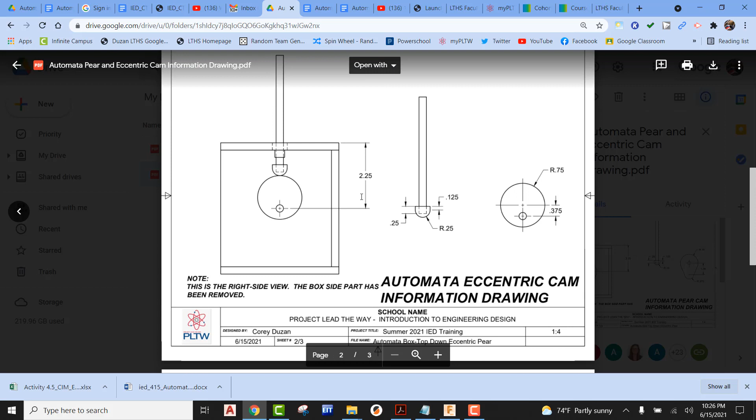Just a heads up, if you go out into our course folder, into Automata Resources, and come down here to find your Automata Assembly Information Drawings, you're going to see one called Pear and Eccentric Cam. We can scroll down to the second page. I'm going to be referencing this drawing for this second video tutorial.

All right, so back into Fusion. First things first, I know I told you to put slider joints at the end of our video tutorial where we were bringing all the mechanism stuff in. I'm actually going to have you tear those out, and we're going to reset that so we can have a good reference point to make the rest of these numbers work.

All right, so I'm going to come up here and find my slider joints. Now, if you're not seeing joints, all you have to do is come next to joints and pick on the fly out, and now you're going to see all the joints that we have used so far. I'm going to find my two slider joints at the bottom, and I'm going to go ahead and simply delete those. Once I delete those, I can now grab it by the follower rod.

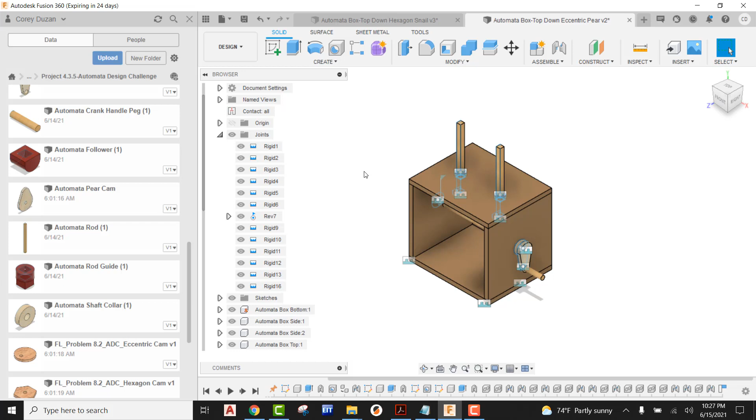Oops, I know what I did wrong. Let me just fix one thing real quick. Okay, now I can grab them by the follower rod and pull those out. And now I can go ahead and kind of reset these with two more slider joints.

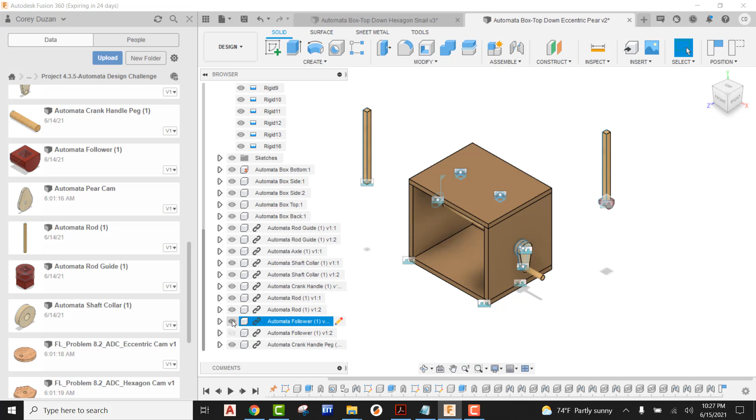So before we get to that, if I come down here, you should be able to see two followers. You're just going to come over here and hit the eyeball, and that's going to turn off the visibility for those followers. We're doing that because we want to use the bottom of our follower rods in order to put in a joint between that and the actual top of the guide.

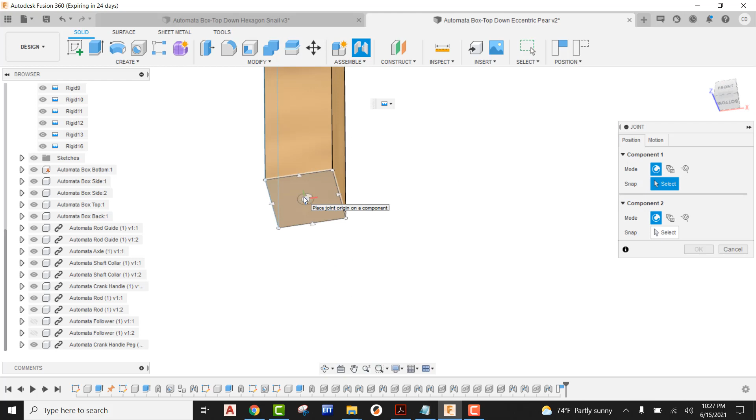So let's do that. Let's go to joint. I'm going to look at the bottom of this follower rod, find the dead center, pick on it, and then here at the top, we're going to come right here to the guide, find that dead center and pick on that to place it in. Now we can see that didn't do the sliding motion that we want, so switch over to our motion tab and find slider, and now we can see that goes up and down. All right, so that's resting right on top there with the slider joint.

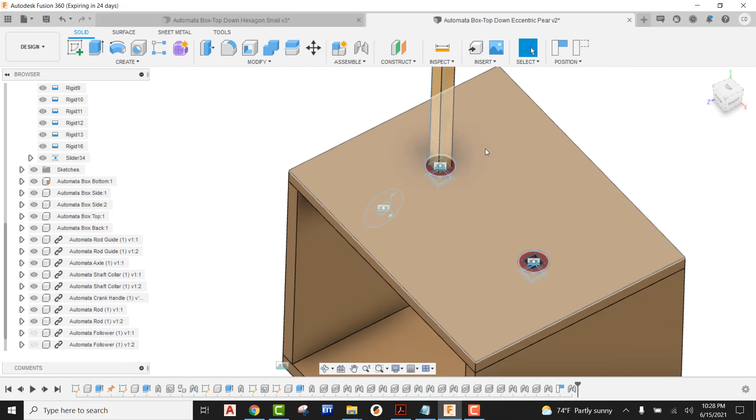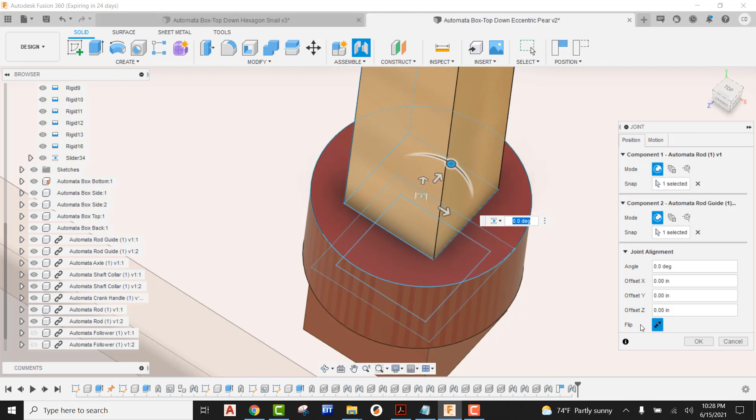All right, so we're going to do the same thing for the second one. We're going to come up here, go to joint, come to the bottom of this follower rod, come up here to the top, get in here close to the guide, and we're going to find that dead center. That's going to come right in. It remembers from last time we were using sliders, so I like it. So I'm going to go ahead and say OK.

All right, so now that we have both of those rods in, now what we can do is come out here and turn on our followers. So I'm going to find followers over here. I'm going to turn those back on by making sure that eyeball is being shown, and we can see that those followers are here.

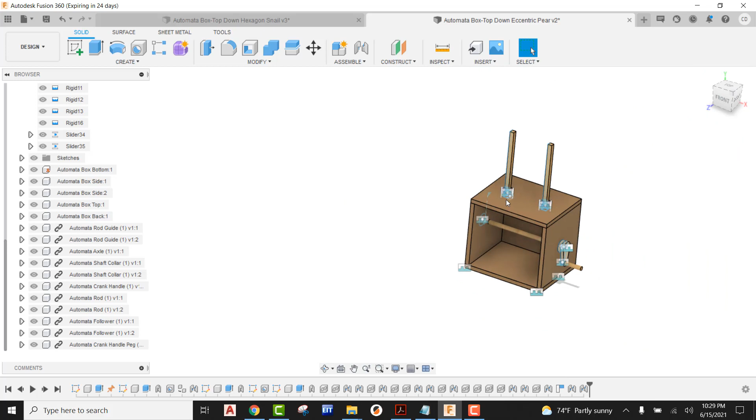All right, so for this one, we said we were going to be using eccentric. So I'm going to go ahead and just drag eccentric across the line, bring that in, grab it by the grip, pull it up off the origin. And before I get out of here, there's a couple things I want to do.

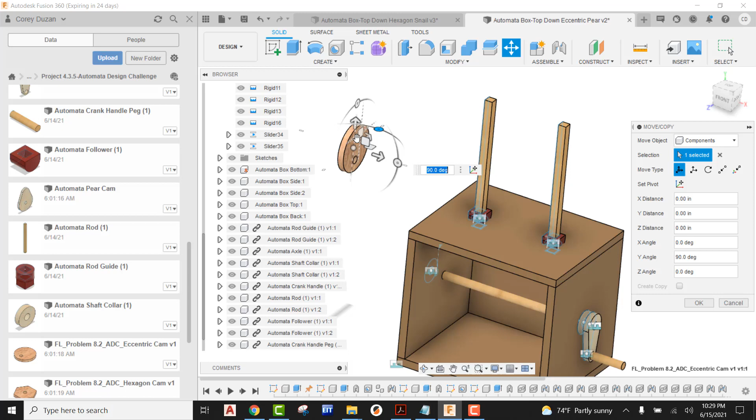All right, so our eccentric cam, we want to probably use the dial, and we want to just sort of nudge this into the correct position. So I'm going to go with 90 degrees this way, and I want the upper lobe of our eccentric cam to be going straight up. All right, so once that is in, I'm going to go ahead and say OK.

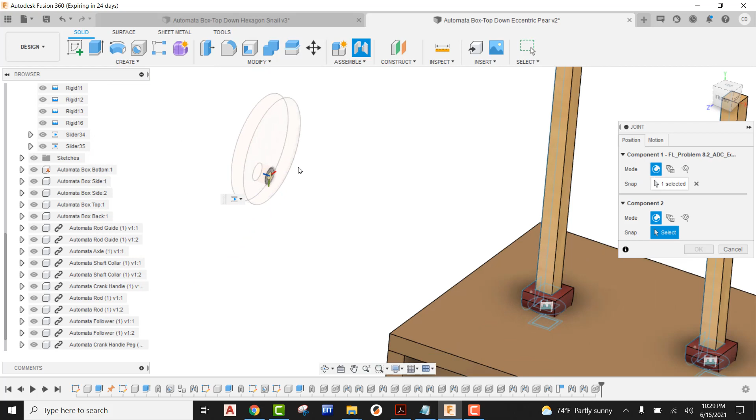All right, so once that's in, now we can come here to joint. I'm going to come right here to this face at the top of the hole, find this joint origin and select it. I'm going to come right over here to the end of our actual axle and pick on that. Unfortunately that's not a rigid joint, so I'm going to go ahead and switch that to rigid. So I can see that that is oriented up, it's flush with that surface, we're good to go.

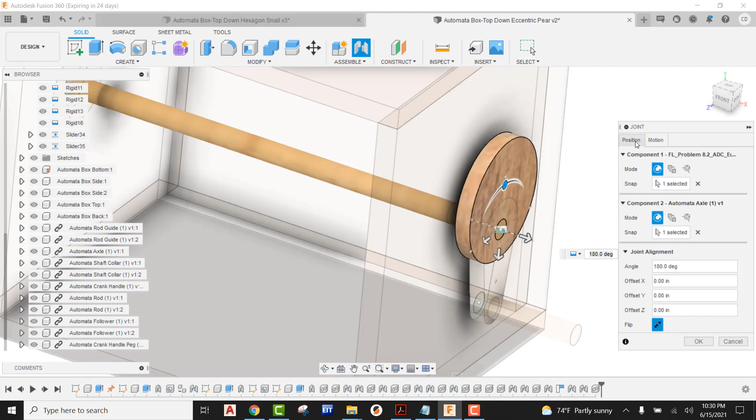But the thing is, we're not gonna get out of this yet. I do want to come back and look at my position. I'm going to look at the front, and obviously we can see that this eccentric cam is not below this follower rod. So I'm going to grab it by the arrow.

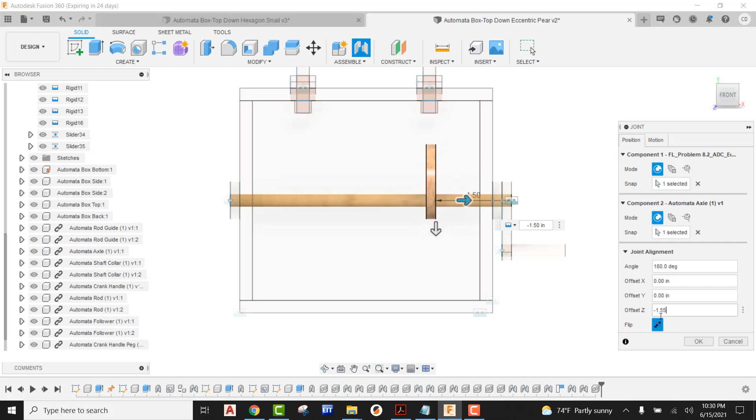I can see I'm going in a negative direction. Looks like I'm pretty close, but it could be nudged over just a little bit more to the left. So I'm going to come in here and change this to like negative 1.55. Get that nudged over. Might be a little bit too far. Let's go with negative 1.525. Looks like that's almost dead center, so I'm going to go ahead and say OK.

All right, so our eccentric cam is in, lobe is up, it's directly underneath the follower rod. All right, we are good to go.

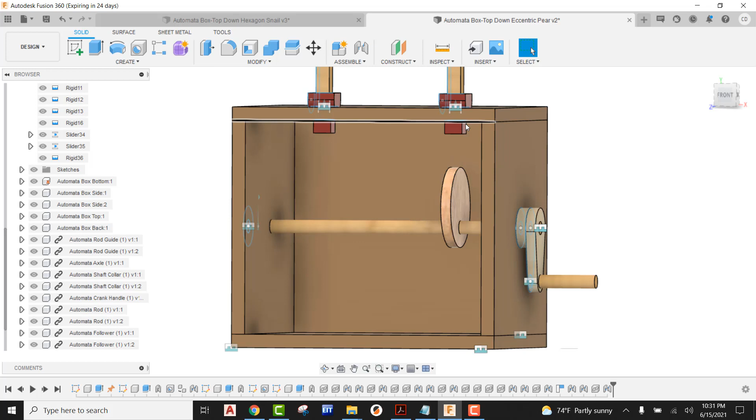All right, so now what we have to do is do a little bit of math, because we're going to take the follower rod and the follower and we're going to push this down, making sure that the follower is making contact with the top of the cam.

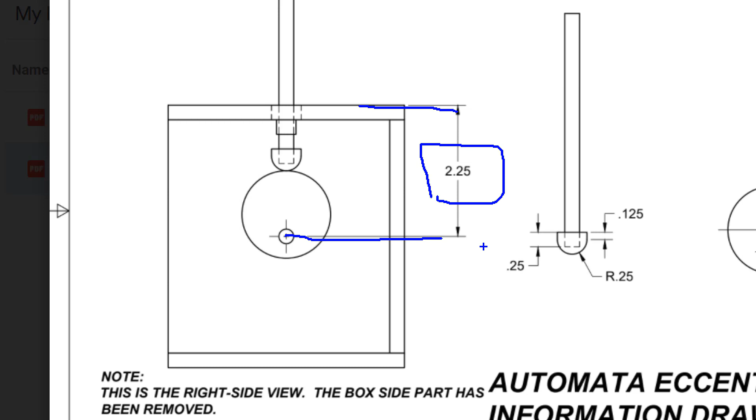All right, so that's where this information drawing comes in. We need to know data, we need to know measurements, in order to get it into the correct position. So if you take a look at this drawing, we can see from the top of the box to the actual dead center of the axle is a distance of 2.25. So kind of lock that away and remember that.

When we look at the follower, we can see that there's a square hole that's drilled down into the follower, and that is drilled to a depth of 0.25. Over here is just this flat face that comes down a distance of 0.125, and then we can see it goes into an arc, and that has a radius of 0.25.

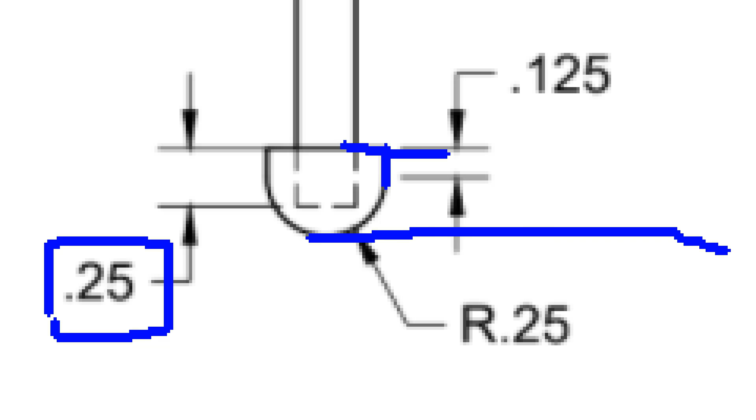So if you're doing a little bit of mental math, you know from the bottom of that to the top would be a distance of 0.375. So 0.375 from here to here, which means - boy, is that an ugly 0.375 - which means we now know, with a little bit of math, what the distance is from the bottom of the hole down to the bottom of that arc. If we took 0.375 and subtracted 0.25 from it, you guessed it, we have a distance of 0.125. So we have to remember that.

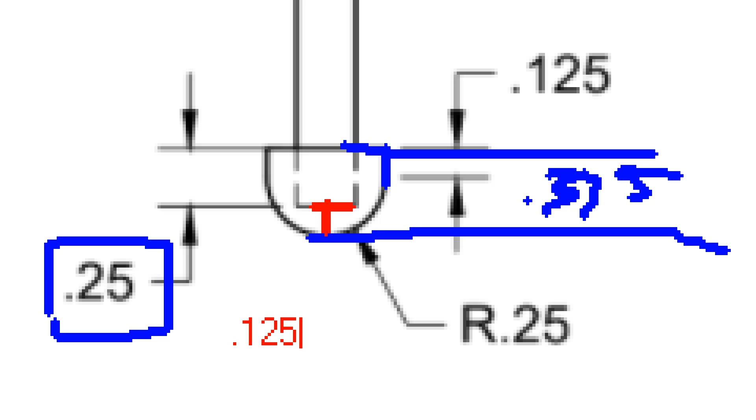Okay, over here on our eccentric cam, if we were to take a look, we know that the distance from the center point up here to the top of the circle is 0.75. We can see that has that radius. If we took 0.75 and we added 0.375 to it, you're going to be seeing that that is a distance of 1.125. So this would be 1.125 from here to here.

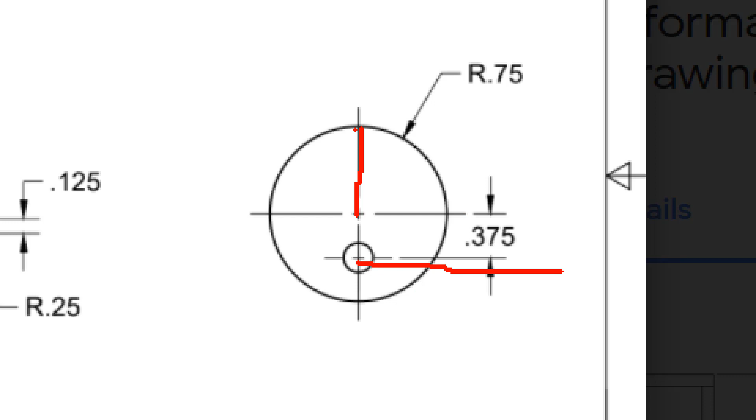And basically what's left over then from the center point of our axle down to this edge would be 1.5 minus 1.125. That means that that would be a distance of 0.375. All right, so these are all numbers that we're going to be using here in a little bit. I'm just showing you where we're getting them from.

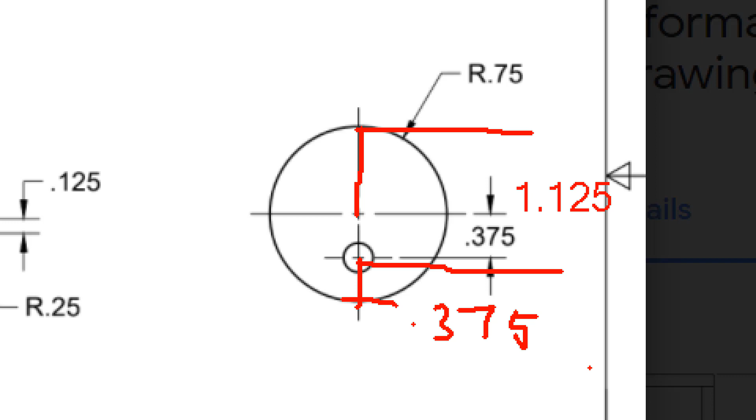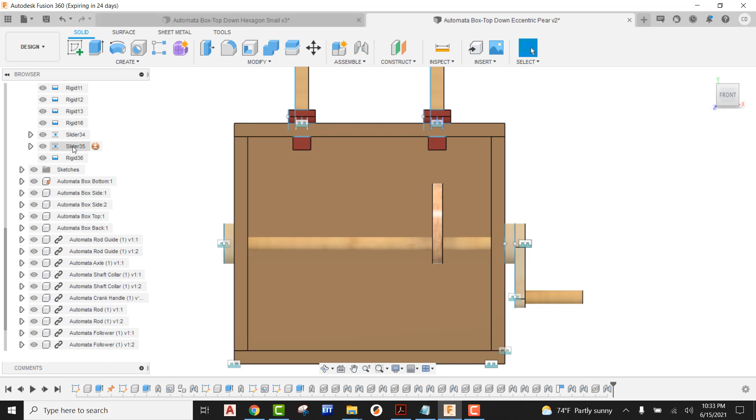All right, so back into Fusion. What I'm going to do is I'm now going to come in here and modify this slider that we see right here. If you're ever wondering which slider is which, once you highlight it - I'm not clicking on it, I'm just hovering over it - you're going to see that one's going to turn darker on those icons that we see in front of us. So I can see in my case, this is slider 35. So all I have to do is right click on that, and what I'm going to do first is edit the joint.

All right, so what I'm going to do is grab the follower rod. I'm just going to pull that down. We can see that that's in a negative direction. So if I took that to negative 2.25, we're going to see that that is going to be dead center, okay, of our actual axle.

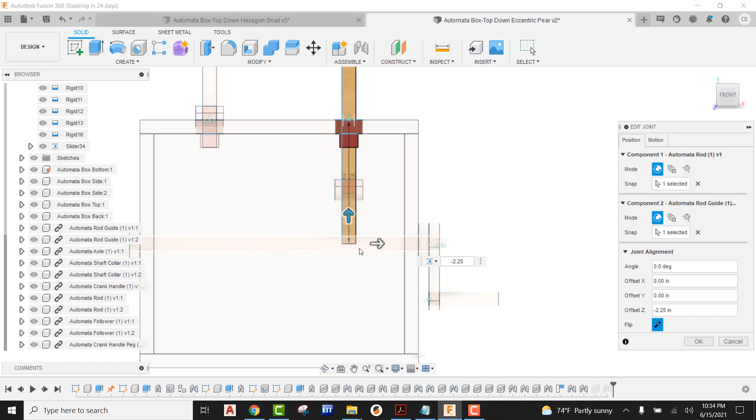The thing is, though, is that we now have to start compensating for the thickness of our follower, and we're going to be talking about the larger side, okay, of our eccentric cam since it's pointing up. So what that means is we're going to be adding that distance, okay, that's here at the bottom of the actual follower, which is 0.125.

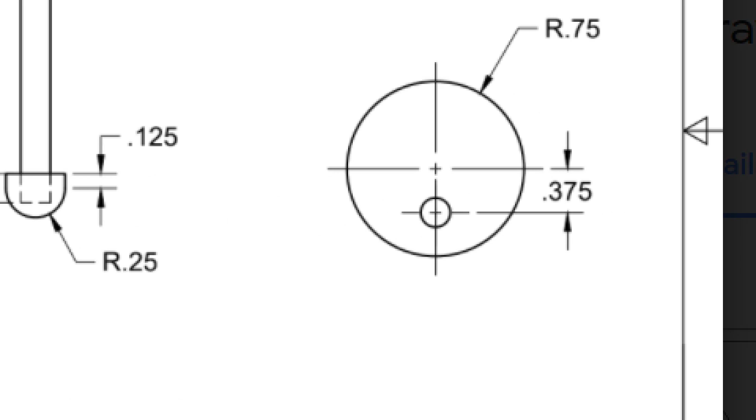So back into Fusion, I'm going to say I want to add to this 0.125, and then I want to add the upper half, okay, of our eccentric cam since it's that top portion that's pointing up. So we said over here, from the hole to the top is going to be a radius of 0.75 plus our 0.375, which gives us a distance of 1.125. So I'm going to add in here 1.125 to bring that up.

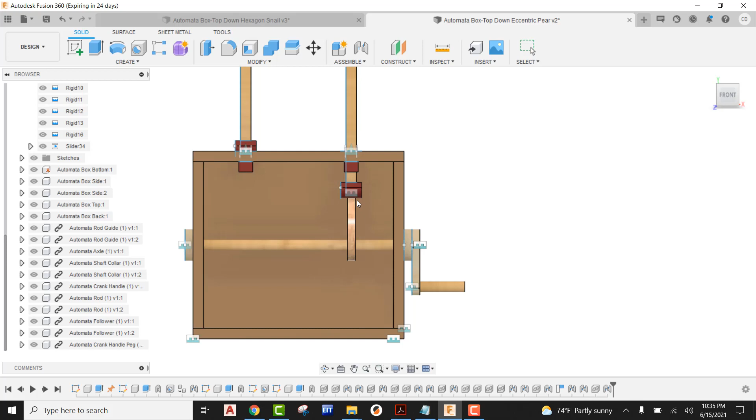Once I've done that, I'm going to go ahead and hit OK, and we should be able to see that follower now is resting on top of the cam.

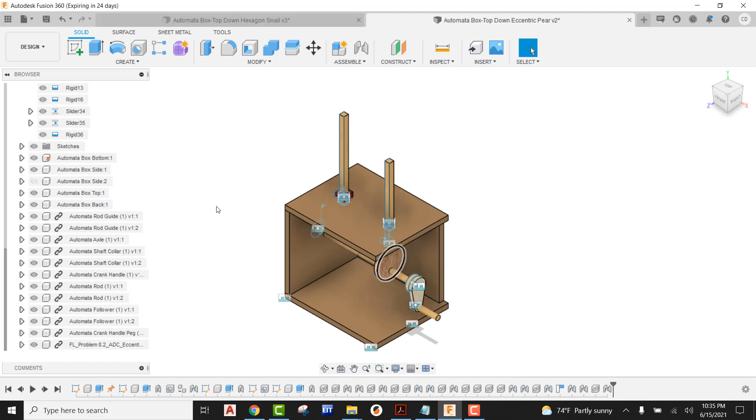You don't have to do this next portion, but I'm going to just go ahead and do it just to show you. I'm going to come in here and just turn the visibility off on my side. Look at this from my right side view, zoom in here, and we can see that that follower is resting right on top of that eccentric cam. So I'm going to go ahead and just turn that side back on.

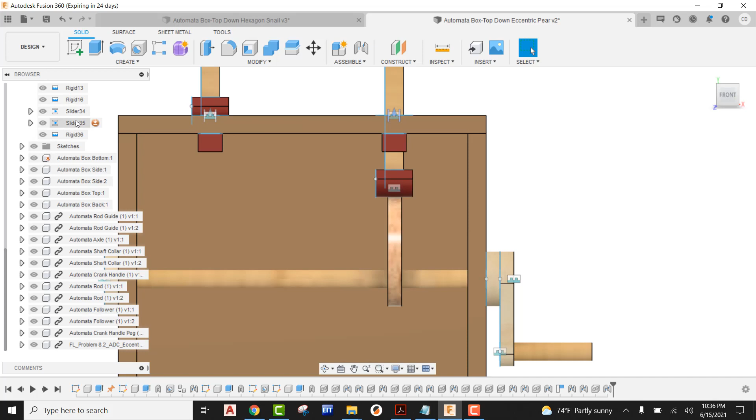And now we can go ahead and start figuring out what our joint limits are. In this case, this is starting here on the top. So I'm going to come up here and find which slider this is going to belong to, and I can see that that's slider 35. I'm going to right click and pick on edit joint limits.

All right, so the thing is that our rest is going to have to be at the lowest point that it can, okay, on the cam. So I'm going to come in here and go to rest. What we're going to have to do here is just a little bit of math. So right now we're sitting at the top of our cam, which is 1.125. And if we subtracted 0.375 from it, we're going to see a distance of 0.75.

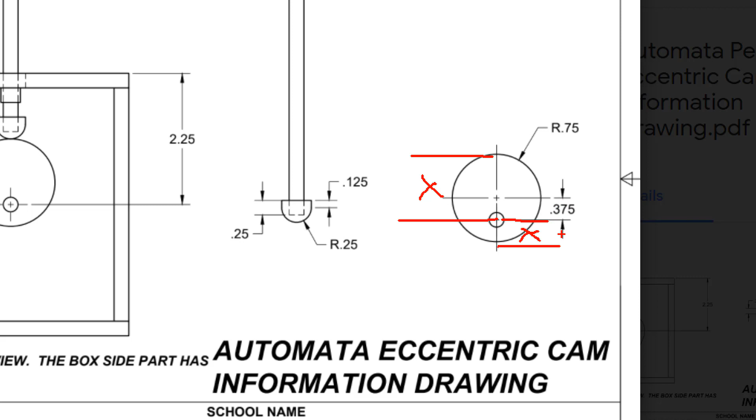So if we take a look here, what we're going to do is take the maximum value that we have, and we're going to be subtracting the minimum value. That's why it's going to be 1.125 subtract 0.375 to find the difference, which in our case is going to be 0.75.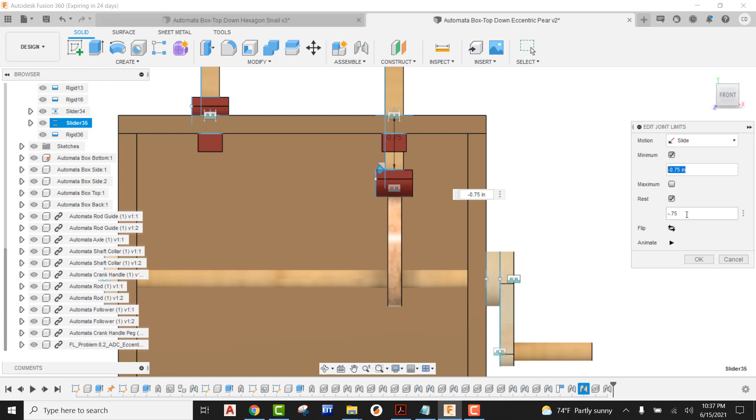So I'm going to come in here to Fusion, and when I go to say I want to change my rest, I'm going to go in a negative direction down negative 0.75, so we can actually see where that follower rod's at. With our minimum, what we're going to do is change that to a negative 0.75 as well. So our minimum is set at negative 0.75 and our rest is sitting at negative 0.75. I'm going to go ahead and say okay.

And now we can see that that's sitting on top. Let's see if the behavior is correct. So if I come up here and go to assemble, I'm going to come down and say I want to enable all contacts. I'm going to flip this into a home view, flip this around a little bit where I can see it. And now I'm going to grab this by the handle and start pulling this around. We can see that that relationship is good. So we have just fully constrained that eccentric cam.

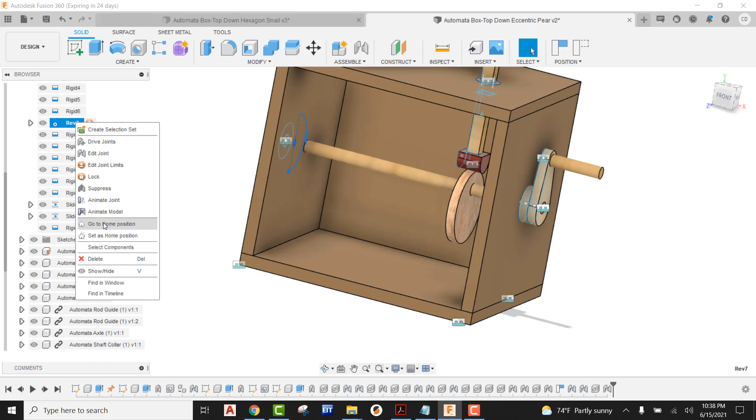Once again, if you want to set this back to the home view that we started with, all you have to do is come up here to Rev, make sure to come and go to home position. It's going to start out right where you started the entire thing. So there you go. That is how you use joints, use the mathematical data that we have regarding measurements, and apply that all to fully constrain that eccentric cam in your automata.